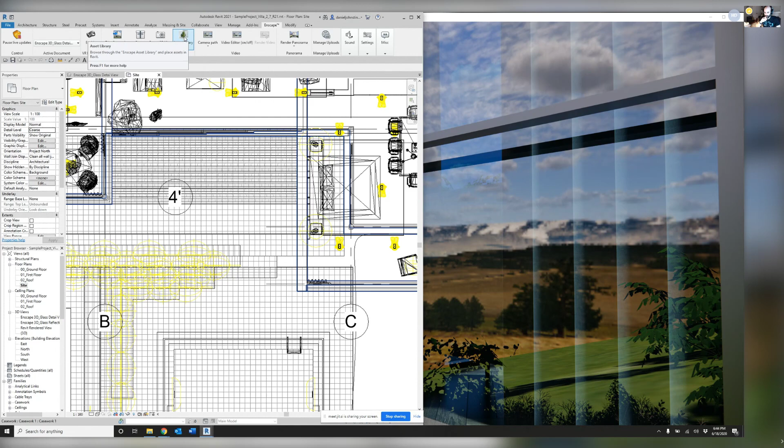So a lot of the content that comes with Enscape, cars and exterior trash receptacles and things like that, just aren't something that they have a need for. And they do a lot of high quality presentations. So Peter did some reverse engineering and got some input from the folks at Enscape, and he wrote a tutorial on the Enscape forums. And then I republished it on my blog a couple weeks ago.

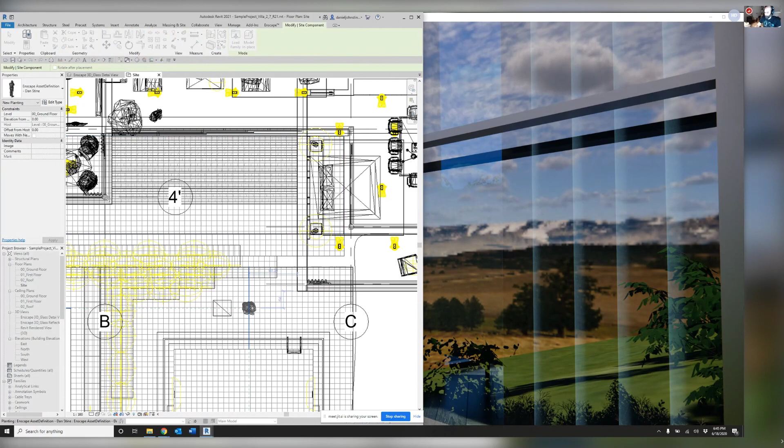Yeah. But you can see there's just a beautiful array of content here that you can create. Obviously, there's some special steps involved to make all this happen, but there's some really amazing content in here that they can use to further their brand, and the content with entourage, silhouettes, and then this is something he actually, for me, did a little bit of work to get something that had been previously created for an RPC content.

And that is, you see, things are running a little more sluggish while I'm sharing. Nice. So that's me. Yeah, look at that, huh?

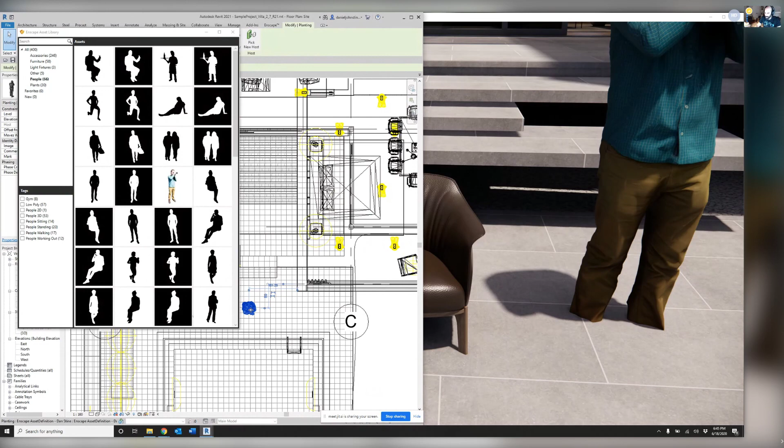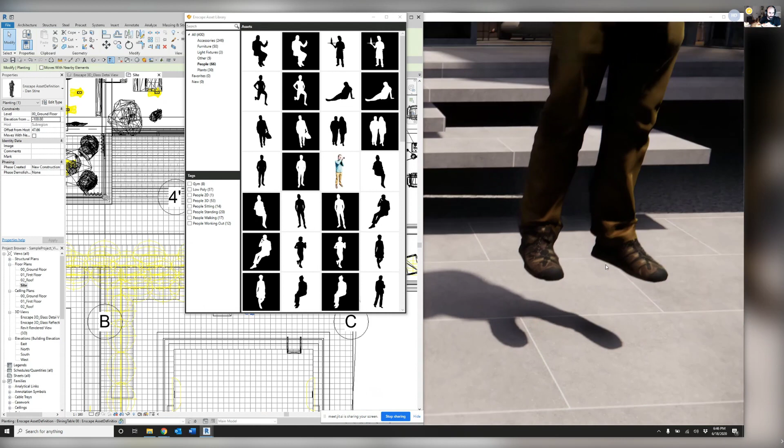So how many assets does he have here? It looks like there's quite a few. Yeah, there's 400. You can see in the parentheses after all. Yeah, so you can see my Keen shoes. It's just really great content. Similar quality. It's on par with what Enscape has. And there's the opportunity to toggle to the out of the box or the Enscape provided content, but all of his content is actually local, which is nice. So it loads a lot faster, it looks like.

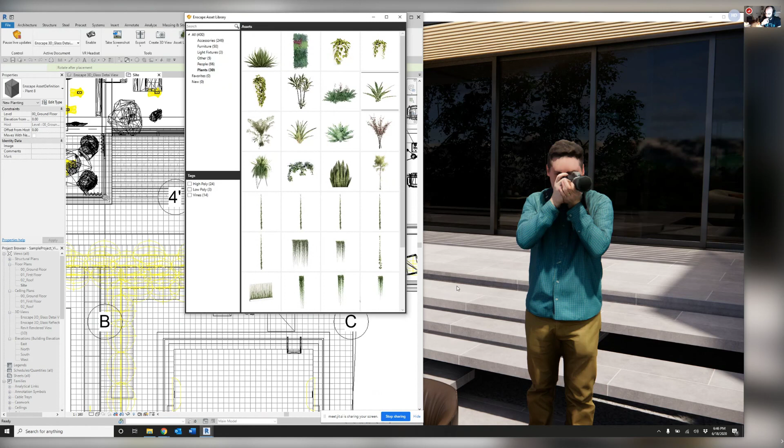Yeah. And then like a week later, he gave me another tutorial on creating leaves. Some of the cutouts and things that you need to do to make vegetation. So here's a cool plant on a stand. Very nice. Yeah, those look great.

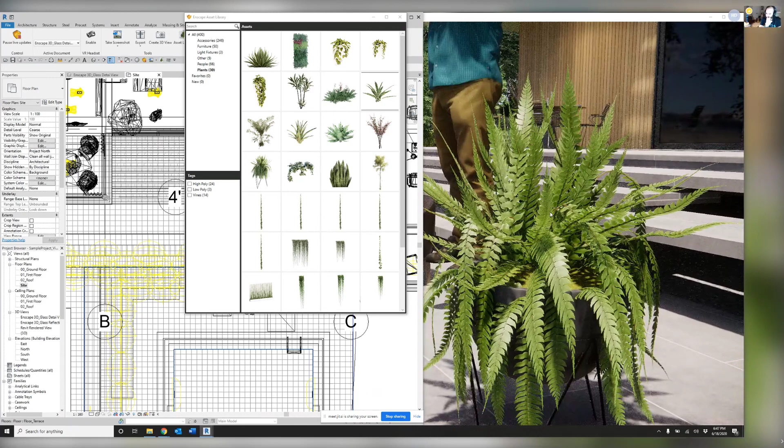So now, do you know how these were made? Were some of them scanned objects, or were they mostly modeled objects? I believe modeled. Like mine, the model of me was scanned. But I'm not actually sure, to be honest. Yeah, because those plants look phenomenal. The detail in those plants.

Yep, and I know even Enscape, talking to them a bit, most of the vegetation is modeled just because it's not really possible to scan something that's complex because you just can't see it from every angle, right? Yep. Even that furniture, that chair you just placed in the patio, the way the fabric folded in those creases, right?

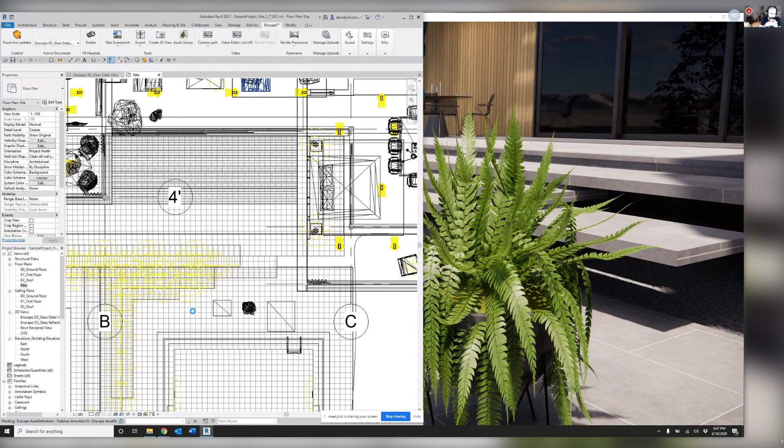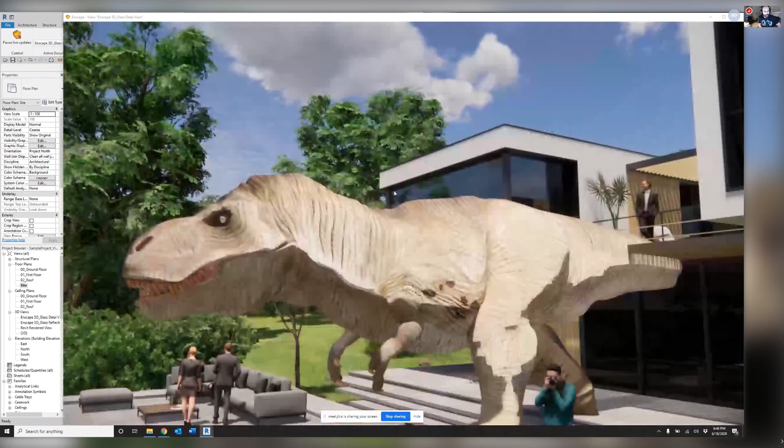Okay. Wow, look at that, a T-Rex. There we go. Now we're talking. Gotta have a little fun. So you have a bunch of these in this house. Can you run through a couple rooms and show how they look?

So actually this model is a sample project that anybody can download. And it's funny, when I said I'm going to work for Lake Flato, I pulled this up and I forgot that nobody could actually see it. That's okay. We see it now. Yeah. I held up the book though. Top ranked firm by Architect Magazine.

So on the Enscape website, if you scroll all the way to the bottom, there's free sample projects. And the one I'm using today is this residence. It's a really beautiful model with really awesome assets in it. Later, I'm going to be opening up this IES light gallery when we talk about lighting as well. So when you download this, it's a zip file with the textures.

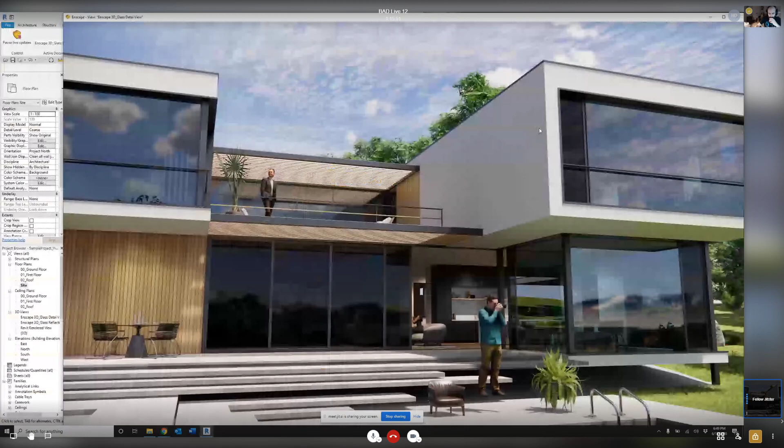And one thing, if you end up copying textures, this is a little side option to be aware of, right? If you go into Revit options and point to that folder, this allows Revit and Enscape to find those textures. So if you're downloading stuff from Haworth or Steelcase, Coalesse, you have to download the textures separately, right?

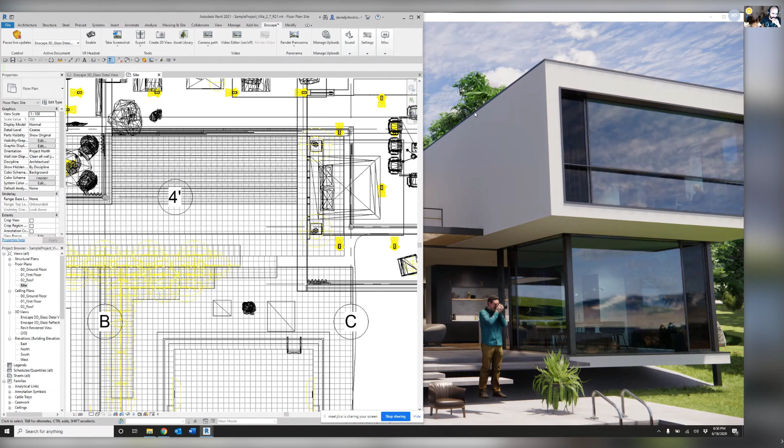Awesome. So I recognize the sample scene. Are these mostly the Enscape assets that are in that scene? I thought maybe I saw a couple new ones, or no? Yeah, so I think they have some things in here that aren't available in their library. So there's some pretty nice sofas and pillows and cushions. Cool. All right, awesome.

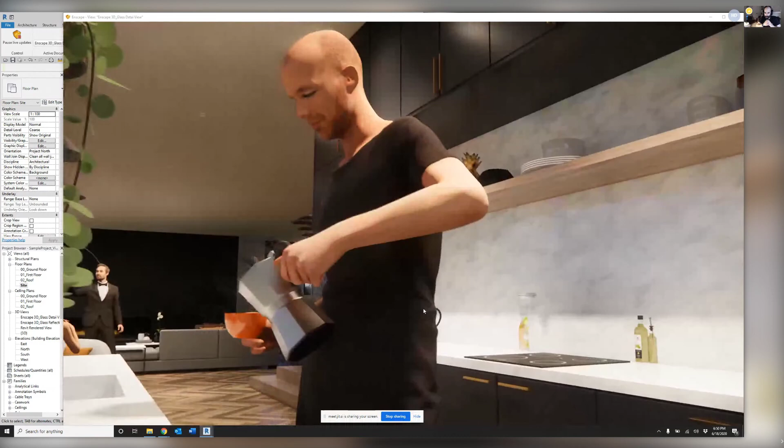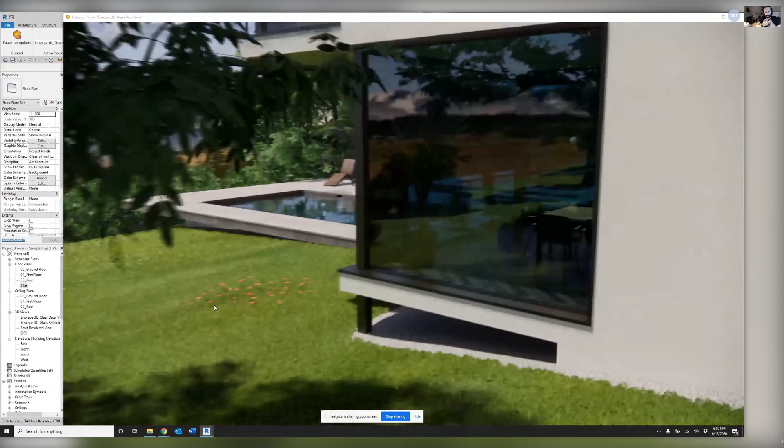All right. Should we move on to the next item? Yeah, let's do it. So custom assets, number one, and I will say that I do know Enscape is working on increasing their library. Every release they have more assets, so there will be more assets, I'm sure. I know there's going to be more assets in the future too. So they're increasing their assets, but people are able to create their own, which is phenomenal.

All right. So next we're going to talk about grass. And I should mention too, I'm using this 3D connexion mouse, which has been a little choppy now that I started sharing the screen. Normally it's pretty flawless. It allows you to, look mom, one hand. Yeah, interesting. I've never got into the 3D connexion mice. It just didn't feel natural to me. But everyone has their thing. It works a lot better in Enscape, if you invert the settings so that you push down on it, you go down, and you pull up, you go up.

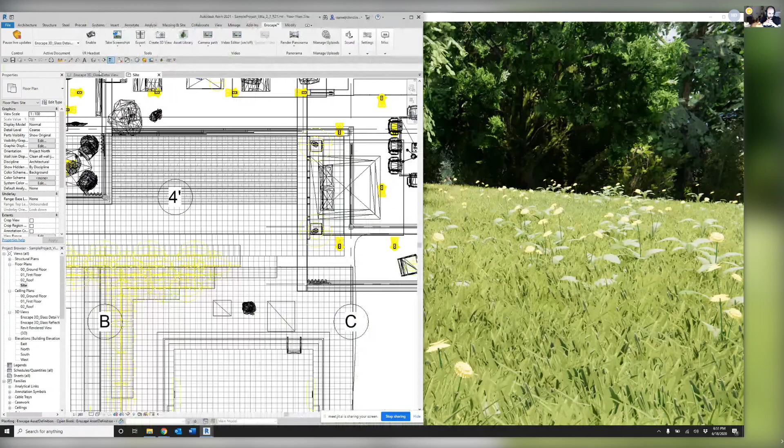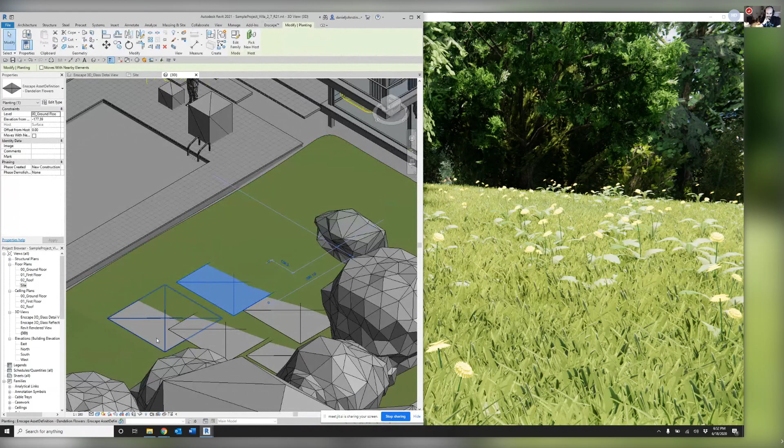But so grass. One thing that I find a lot of people don't know is you can adjust the grass. Yeah. So the first thing I noticed was the dandelions. Those are some hardy dandelions, and they look awesome. I know some people don't want them in their lawn, but they look great in renderings. Right, and so that's an Enscape asset. That's what these big squares are. So you're kind of limited on the shape.

So that's a custom asset from his library? No, this is Enscape provided content. Oh, cool. I've used that in a couple of projects myself. I didn't even know that was there. I knew the planting and stuff, but that's awesome. So, all right, look at that.

I learned something right there. Dandelions, they have assets for it. So I have pick by face turned on so that I can select the grass, and you can see the material is called grass. As most people probably know who dabbled in Enscape, if the word grass is in a material name, and sometimes that's unfortunate for like art glass that has the word grass in the name, right? Mm-hmm. You have to remove that in some cases. Mm-hmm.

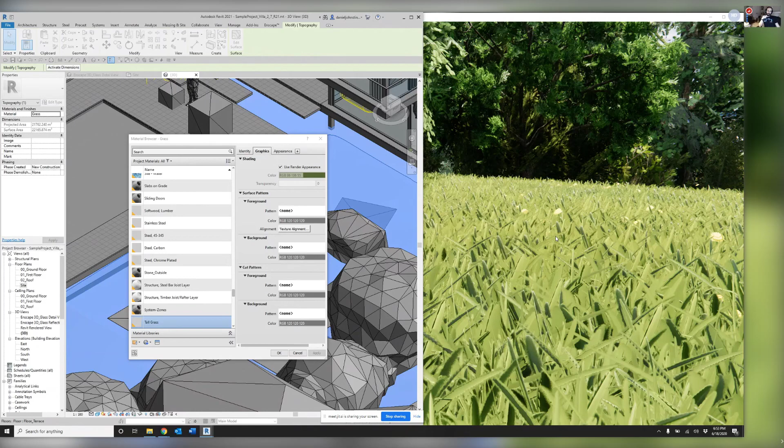But the name, if it has tall grass in the name, and I zoomed in by the dandelions just so we can actually see the change happen. Where'd the dandelions go? Wow. So would that work if you said tall green grass? Or does it have to be this? It has to be tall grass, the exact term. And now I'm going to show you how to deal with color in just a moment.

So tall grass, another option is short grass. Wait for it. There it is. So the short grass is sort of a nice manicured looking lawn.

Now, interestingly enough, as most people may know, Enscape also works in SketchUp and Rhino, Vectorworks, ArchiCAD. In those other tools, Enscape made their own material editor because SketchUp really doesn't have the controls to manage a material, whereas Revit has one that does most of what you need, so it doesn't make sense to make another one. But in SketchUp and those other tools, there's actually two sliders for height and variation. That gives you ultimate control in the height here instead of just the names.

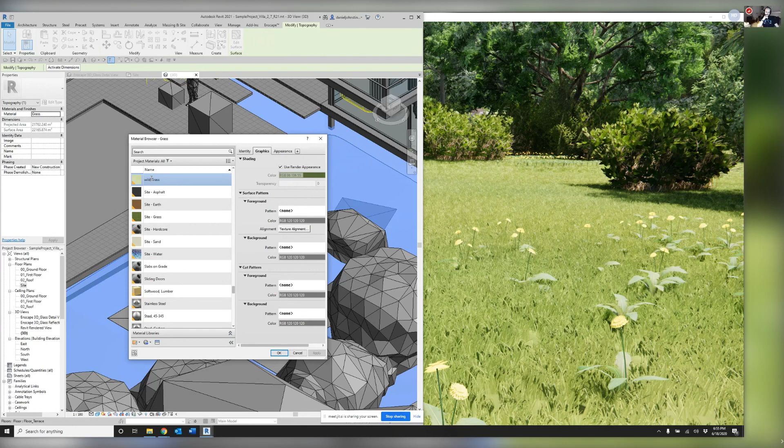And there's one more called wild grass. This is mostly tall grass of varying height. That's awesome. That gives a lot of control. I knew grass. Well, I shouldn't say I didn't know. I just didn't utilize it as much as I guess I should have. The wild grass I didn't know. That's pretty cool.

Now I'm going to switch that back to short. Now the default when you just say grass, is that considered the short grass or is that a medium? It's medium. Got it. Right. So short, just grass, tall grass, and then wild grass are sort of the four hierarchies. Awesome. All right, so I'm going to set it to short, and then the next thing that's kind of helpful to know is the grass color.

I also wrote a blog post on Enscape's website to get different species or different types of grass, and the one in the sample model here is already sort of doing what I'm going to describe, but the grass that comes with Revit, the albedo is way off. There's two, one's called site, one's called grass. One's way too dark and one's way too light for the albedo, which in the gaming world, they've nailed that concept of getting the base material, the correct color. So here you can see there's a pretty large variation in this texture that they're using, right? So there's a really light color there. Yep.

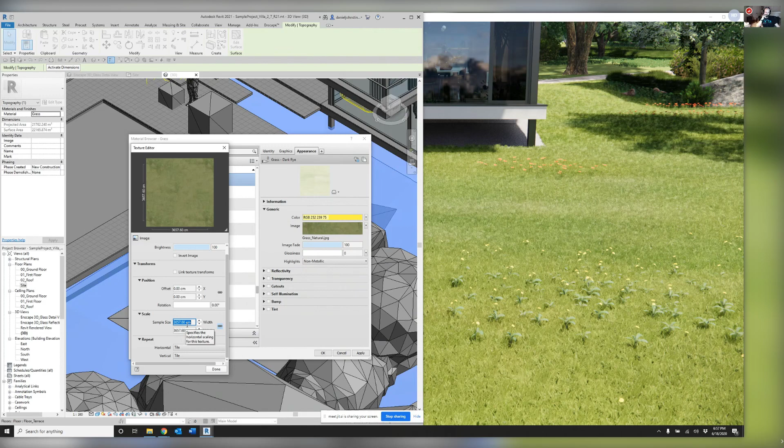So another little Revit tip, not so much an Enscape tip. This is obviously a metric based template file. You can see it's listing centimeters. But if you come in there and type 120 and the foot symbol, even in a Revit dimension, like if you're drawing the length of a line, you could type 25 cm or 25 m, and it'll convert that metric value to a hard imperial value, or vice versa.

Yep, that's a great tip. That's something I think a lot of people forget, is that Revit is unit agnostic. Right. It's very friendly back and forth, and that even works on formulas too. If you're typing formulas into dimension strings or something, you can do them all in feet as long as you're putting the units there, which is great.

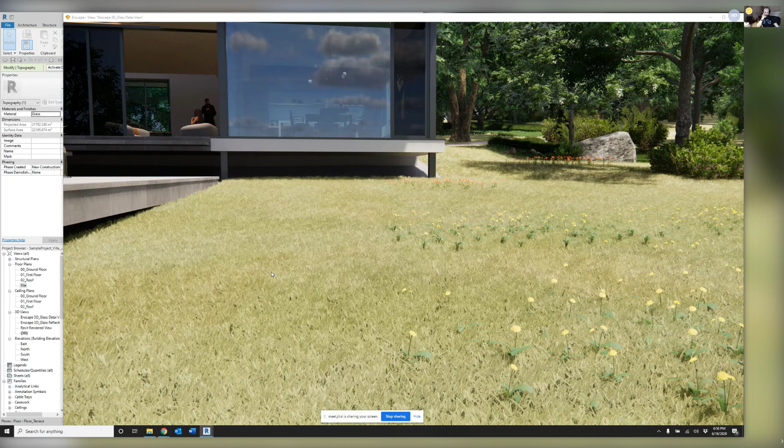That's a good tip. So now we have a nice grass color, and of course it depends on what kind of grass you're trying to achieve and where the project is, but you can see there's just a nice variation in color. It's not just this solid monolithic color, which is never a thing in reality. Right. Nice. Yeah, it's a little desaturated too, which I think always looks a little better in renderings. Right. And what's happening then is each blade of grass is actually sampling the texture under it. So we can do something sort of fun.

I'm going to do a sub-region. Jeff's already seen a preview of this. It's okay, I don't mind seeing it again. Yep.

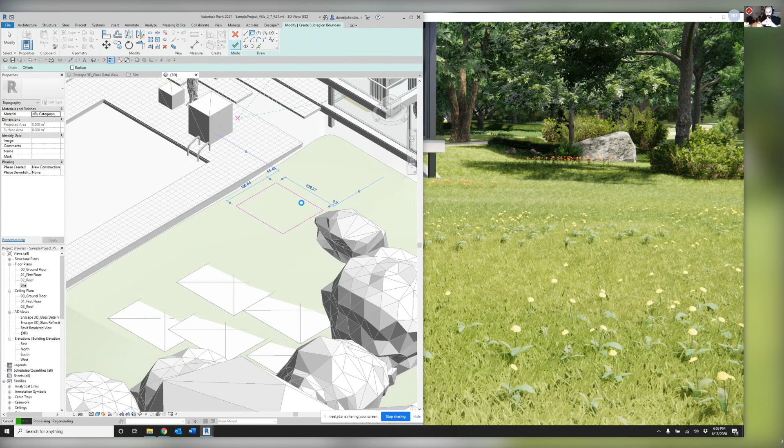So I'm going to make a new material once this is done. So here's my sub-region. I'm going to create a new material. I'll just duplicate some material. Call it grass. And nobody can answer this question verbally, but what's the first thing you need to do after you duplicate a material?

That's a great question. Actually, let's see if we have any answers. So, what do you have to do when you duplicate a material, everyone? I actually have a post from many years ago that's one of the most popular posts on the blog about this. I have a Revit idea about this we should put in the notes too, so everybody can go vote for it. Oh yeah? Yeah. I have it February 3rd, 2014. Nice. So I'll post that link in there.

Oh, yeah, somebody got it. Peter just got it. First one to answer. Duplicate the appearance asset. Thanks, dude. I think that deserves a book, right? What do you think? Yeah, for sure. He's cheating though, because he and I have talked about this recently. Maybe he doesn't get a book then. We'll let you decide that.

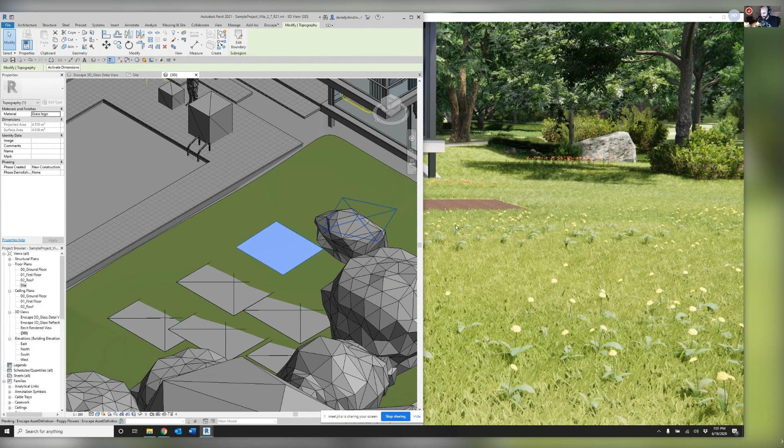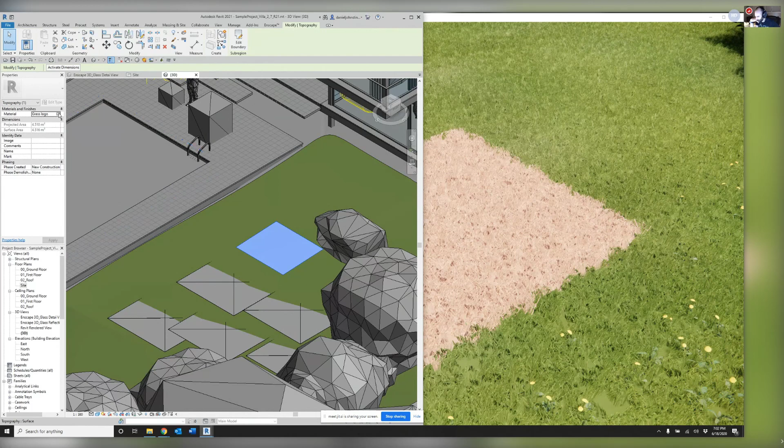Actually, Dan, you know what? That was a repost. I just clicked into it. That was a repost from your blog, I think. Oh, really? Nice. Check that again, because I just clicked into it, and let's see. Double duplicate. Oh no, it's a dead link. Yeah, maybe it points to the Enscape blog. They actually just redid their blog, and a whole bunch of my links on my website to their blog are now dead, unfortunately. Did you write some posts on AECbytes? Yeah. There we go. That's what the link was to. The dead link to AECbytes. All right. Well, maybe we'll have to repost that. We'll have to make that again.

Awesome. So you're putting the logo in. Yep. There it is. There we go. My size adjustment didn't work originally. Awesome. So you can do sports team logos, all kinds of good stuff. And I'm assuming now when you do it this way, if you just have the word grass in it, it's always going to be the medium grass, right? Right. Yeah.

So someone actually had a question that I think is pretty good and that's related here. Let's hear it. I lost it. Hold on. Okay, here we go. So John Gray, thanks for joining us. He said that grass keyword is an amazing feature. Are there any other keywords in the material names that work with Enscape? That's a good question. There used to be, but more for SketchUp and Rhino. But once Enscape made their material editor, I believe most of those went away.

So now, if memory serves me right, water has to be the water asset. It's not the name, correct? Right. I think it has to be the water material asset for Revit, not the name, right? Right. Yeah. That's correct. So I guess there were some that I used to remember too, but I don't think that any of them work anymore. Yeah, I can't think of any. So if anyone from Enscape is on the chat, feel free to chime in. And then if I think of any when I repost this on the blog tomorrow, I will. But that's a great question.

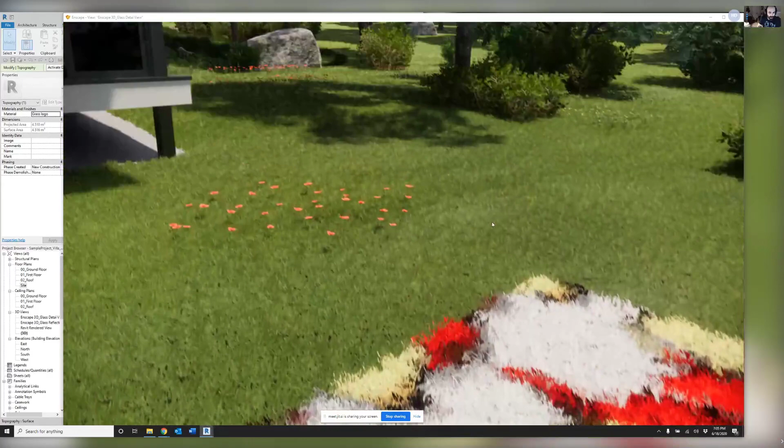Can you change the grass type in Revit? Or is it only the heights? Only the heights. That was just colors based on the... I got you. Yeah, colors based on the material or the asset. The appearance.

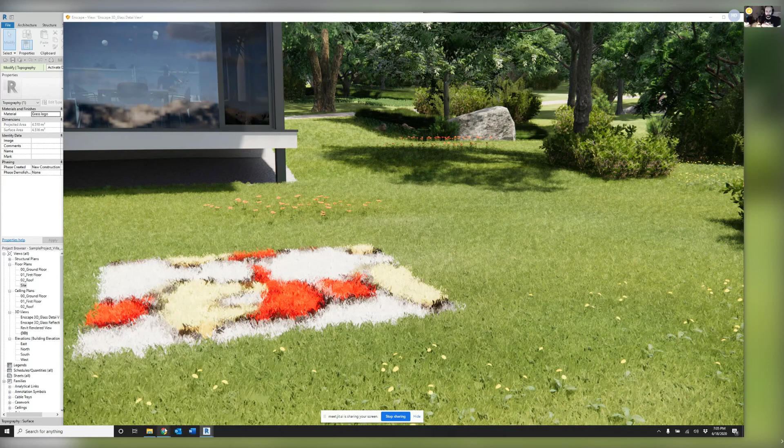Awesome. Well, that's a really cool tip. So, first tip there was duplicate materials for less headaches. So when you create a new material, always go over to appearance and duplicate the asset. Huge. And then being able to apply material to the grass, the blades actually take the material, which is super cool.

Yep. All right. Are you ready for number 3? Let's do it. I think everyone else is ready. I was just reading through. There's some good chit chat, but no major questions.

So next we're going to talk about real world application of glazing in Enscape. Again, an important thing when you're working on a multi-million-dollar project for a client and you pick the glass, you sort of want it to look right in the renderings, right? So there's different things like the color of the glass, the visual light reflectance, the visual light transmittance. All of those things can actually be achieved pretty accurately in Enscape.

The first thing that's interesting though about reflectance, if you ever open an out-of-the-box Revit template, it's using the glazing material type, so not generic and not the new advanced ones. But the reflectance is set quite low, so it almost looks like there's no glass. My books and my blog are heavily geared towards students, and most people are using the out-of-the-box template.

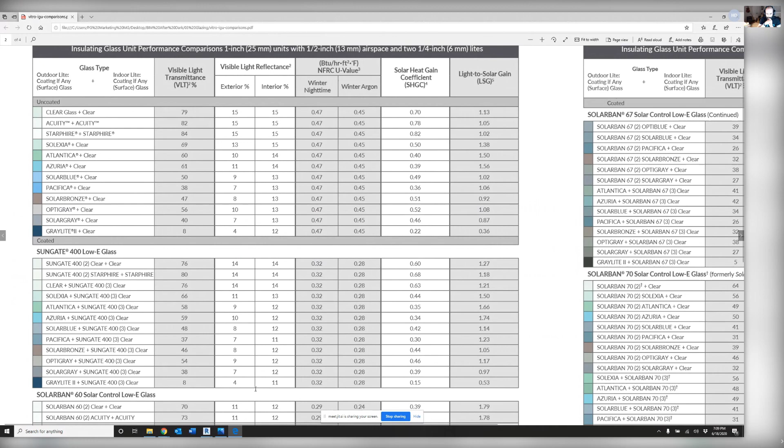Keep going, man. So what they've done is they've applied some real world physical constraints to the slider. And in their research a couple of years ago of literature, they only found up to 12% reflectance in any product literature for glazing manufacturers. Here you can see 14. If you scroll down, there's a couple even higher, but those have some special coatings. So if you're around 50, it's 4%. So anything in Revit around 50 or lower is going to be like there's no glass.

Right. And then if you crank it all the way up, you're only at 12% of reflectance, which again is a real world physical example. So why make it 100%, which would be like a mirror, if that's never going to be correct for the material type called glazing, right? Right. And then you might know, and we'll see this when we get into the material editor, but one material has two sliders, and they just use the average of the two to figure out what this reflectance is. Wow.

So you use the eyedropper, you get that RGB value, and then in Revit, well, actually, we want to figure out what material was used for this glass. So why don't we just select it in Enscape, and we can see the material used. There we go. Another secret. Another little secret. Actually, if you want to maybe unpack that, show users how. I think that there's a setting that you have to turn on for that, if I'm not mistaken, right?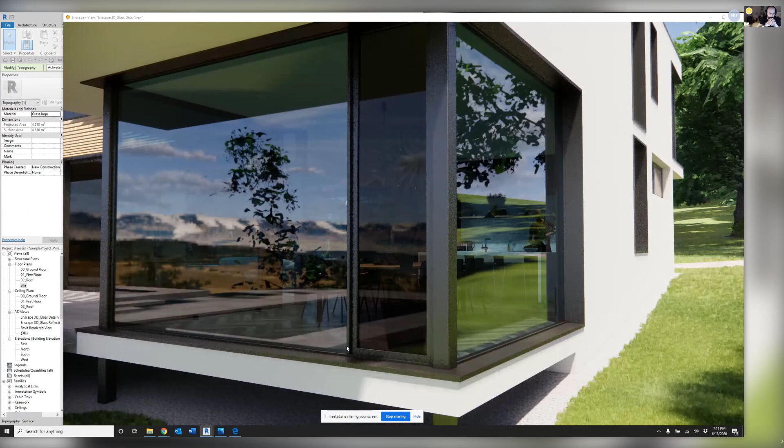Well, now it's just the B key. So okay. It used to be there was a checkbox where you had to turn on BIM information or whatever. Right, and I don't think that's still a thing. I hid the controls down here, but you can see there's just the B key. There's a B for BIM. Yeah. So B for BIM, and you can select any object in the scene and see information, all the Revit metadata, basically, right? Yep.

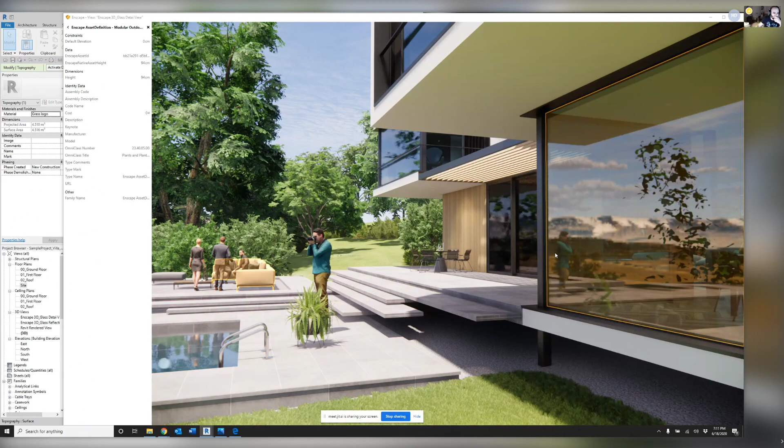And I'm going to save another new thing that's coming out in version 2.8, so you'll really like that. So we know what the material is. I'm going to swing back into Enscape. And I'll actually select it here again so I can just get to the material directly. So we'll try.

Oh man, the amount of new users that I have to explain tabbing through curtain walls to when I'm teaching classes, it's just so not intuitive for people. Yeah. I get it, you know.

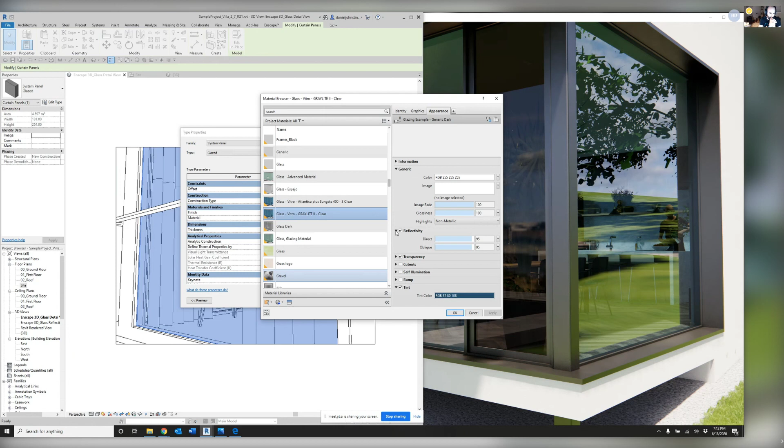Totally agree. So here's one of the glass types that was in that cut sheet. And here's another thing that I learned working with the developers at Enscape on this blog post is that you basically want to leave the color at white. And Enscape doesn't transmit light through the glass. It's just one of those real-time rendering things. It reflects the color of the glass, and that can be achieved by adjusting the tint.

A lot of places on the forums and in blogs, if people are purely looking at adjusting the visual light transmittance value, they'll just enter a grayscale. But if you want the color of the glass to show up, you need to actually derive the visual light transmittance based on color, not just grayscale. And one cool way to do that is if you use an advanced material.

So in Revit 2019, they came out with basically the PBR materials, and I think you've written a blog post on that, right? Yep. PBR materials. Yeah, a couple weeks ago, or maybe a month ago now, when they first came out, I ran through, and that's super cool. When used correctly, man, they look really, really nice. Yeah, totally. I'll definitely post a link to that in the chat for sure.

Related to that, there's one little secret. If you're replacing the material asset and you go to miscellaneous, so the appearance asset, miscellaneous, and then base materials. Here's the five fundamental advanced materials that you can use, and one of them is transparent, which would be for like a glass vase or something that would refract light.

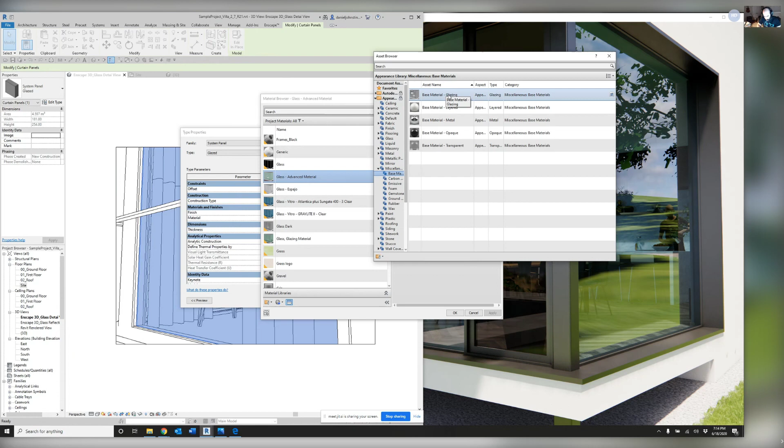And then there's glazing, which in Revit's rendering engine, and similarly in Enscape, doesn't distort light for efficiency. But then the glazing has a value for visible transmittance, which is actually something that's now used in Autodesk's lighting analysis tool for doing daylighting calcs. This actually works. When it first came out, it was sort of broken, but you can plug in a color here using that eyedropper tool, and then maybe adjust the luminance to stay in the same color range.

But as you do that, you'll see the visual light transmittance value adjust. And so the reason I point this out, even though this doesn't completely work in Enscape, you can use this to derive your value and then come over to, so this is the one we're currently on, which has this sort of blue tint to it. If we select this other one, it's a lighter color.

Remember I mentioned there's two reflectivity sliders, so it averages those two, so just make them the same. Right. And then we hit apply, and you watch the material update, and you should see it change to have that tint of, it just updated. So you can see that tint of green now in the glass.

And so this is another example with the glazing material. So this is something between advanced and generic that Revit came out with a few years ago. The sheets of glass doesn't matter, but again, the reflectance and then the tint color, you can basically achieve the same results, whether you're using that material shader or the generic one. And then again, you want to sort of stay away from the transparent option. But that's getting real world glazing into Enscape.

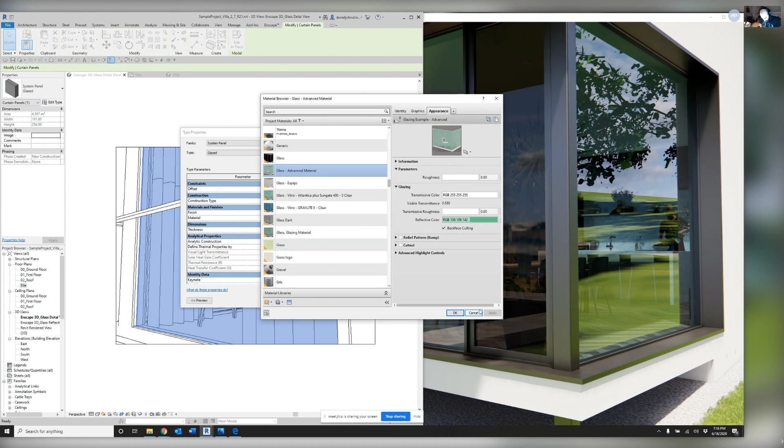Phil Reed has a post on LinkedIn too about getting some frit patterns and things like that. Awesome. Sweet. That's cool. I think that's all I wanted to show for glazing.

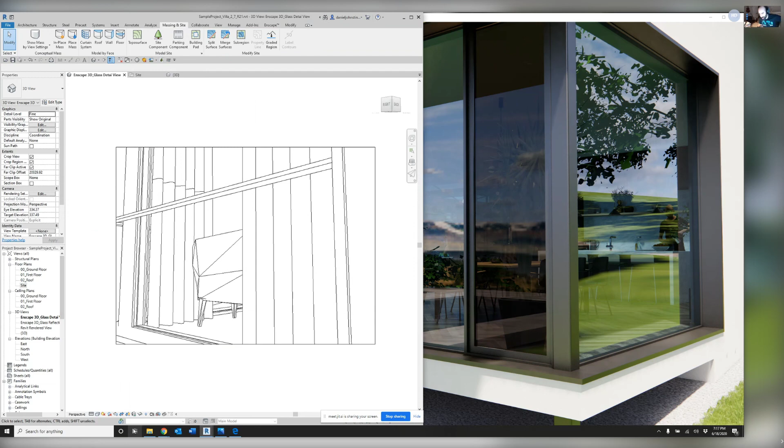All right, so should we move on to lighting? Yeah, let's do it. I think everyone's engaged. I was digging through. There's a couple questions, but nothing. Actually, can you import IES data for lights was a question. Oh yeah, we're going there. Looks like that leads us right into it. So Elijah, thanks.

Actually, I should have thought this through. Before I leave this model, I want to quickly talk about custom Skybox. Oh sure. And so the lighting file I'm going to open is kind of blah. So that'd be kind of a bummer to use that one. So I also did a blog post for Enscape.

You can see there's still big chunks of ice out there in the world's largest freshwater lake, Lake Superior. So this was sometime in March, I think. So let's say we're going to build a building on this site, and we want to have an actual background in Enscape. And what's cool about that is the reflections in the glass and even things inside the building end up reflecting the real world, which would be almost impossible to get all those subtleties if you're doing post production with the background.

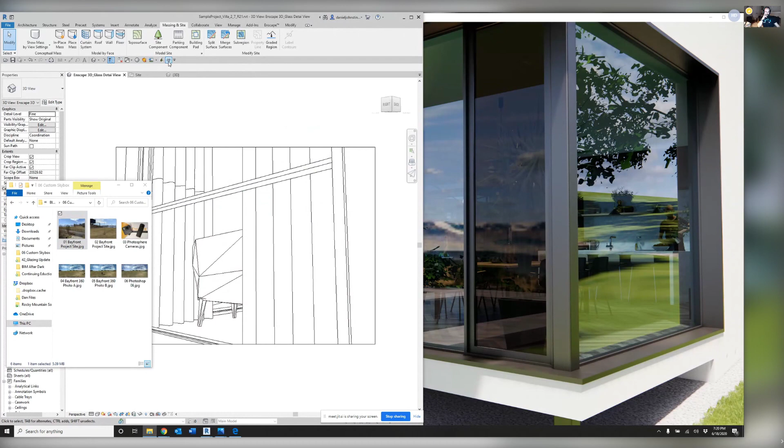So I'm going to go into the settings. You can see all my favorite Enscape commands are on the quick access toolbar. Yep, pinned them there. Very nice. And I'm going to go to Skybox and pick a custom Skybox. And what we're going to see here is the good, the bad, and the ugly of this. There's definitely some drawbacks to this.

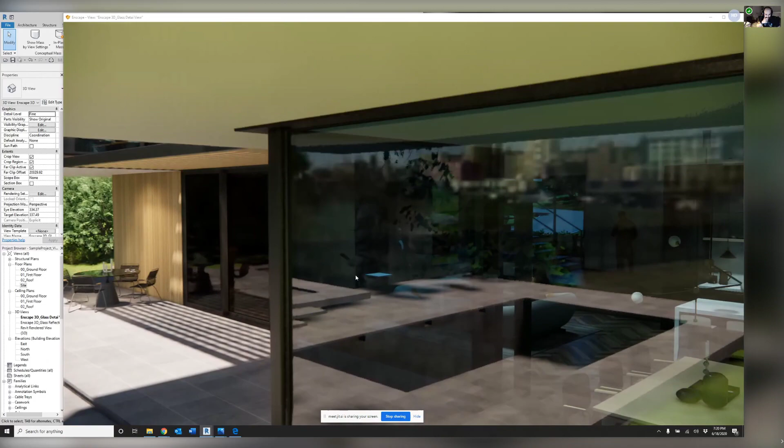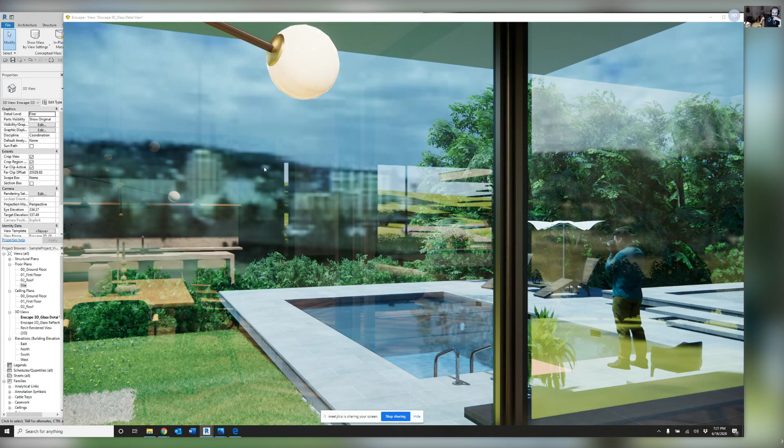So here's the background. And this again is the 1K image, so it definitely is a little bit lower quality. Yeah, it's definitely looking for more resolution. Yep. And they just made an adjustment too that reduces the memory use of the Skybox background. So hopefully it doesn't actually also mean quality loss. But when you're inside the building, even if you're looking towards the building, you're going to see reflections in the glass of the background.

Definitely. Where it really starts to fall apart is depending on how big your site is, right? You can't get too far up before all of a sudden things start looking really weird, or too far away from the building. Yep. Yeah, the scale is a little wonky there, right? Yep. I'm sorry, I'm moving kind of fast, but the point is that if you're in a room and you're not moving around too much, it's going to look good.

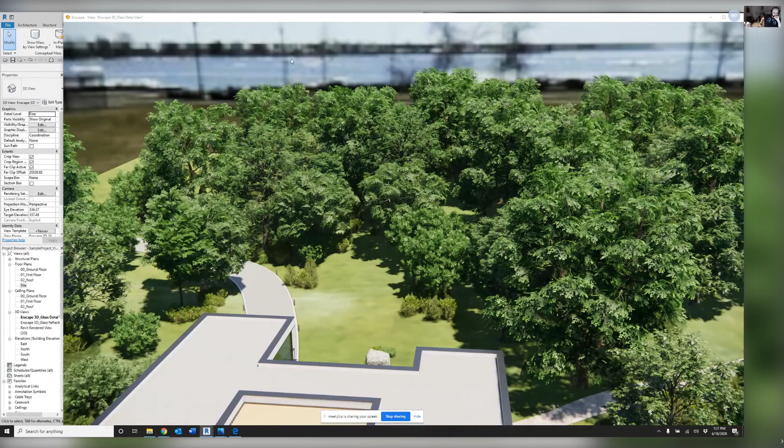But the reason the ones that come with Enscape work is because they're really far away, right? The mountains and the tree line. Correct. Their subjects are extremely far away from the camera, so to speak. Right. So that's the background. That's all I wanted to show there.

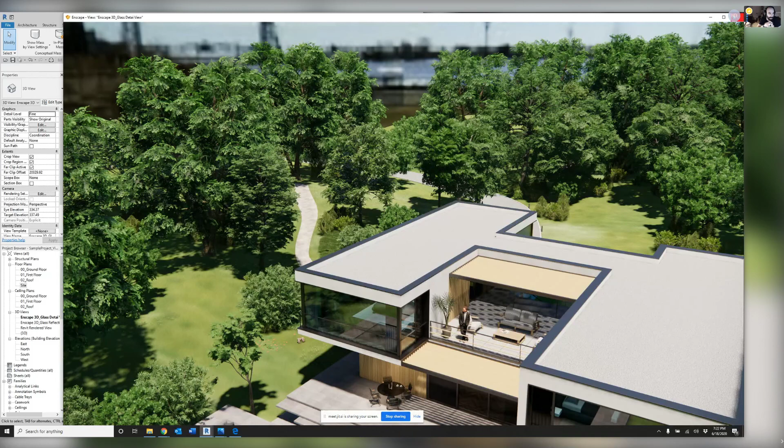360 camera and Skybox. And I should mention that there are lots of stock Skybox images online if you wanted to look. If you wanted something that's not directly your site, but something that's similar, or you just don't want to use the Enscape ones, there are some good websites out there with Skyboxes.

And then there's also an option to change the overall brightness, because it used to be if you used a custom Skybox and then you switched it to nighttime, the background was still super bright and odd looking. So you can see I just adjusted it, and the background changed to be much darker. Great. One last Enscape trick: if you double click on the slider, it resets it to the default. Nice. Double click on slider.

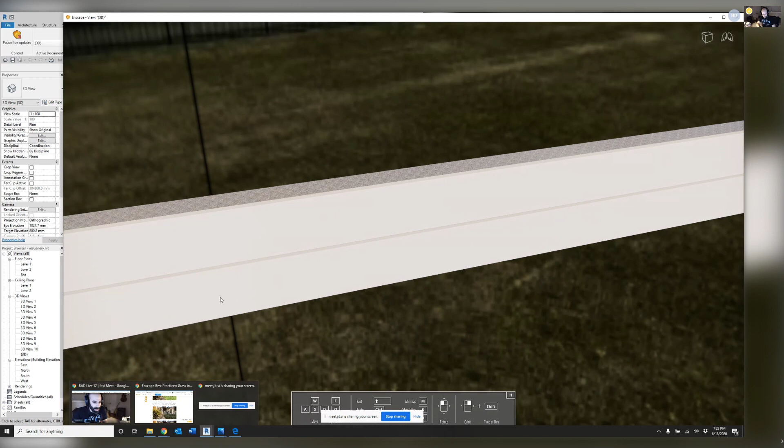So I opened the next Enscape file that you can download from the Enscape website. And I'm going to have to go in and turn off this background now. This is why I wanted to show it with the previous model. I'll just set this to white ground. So this is a sample that has a ton of IES files. And this one is in the same location as that other one, which I think I posted. If not, I'll post it in the description, on the Enscape website.

If the light source is in the geometry, nothing lights up, right? And the Revit family editor will give you that warning. The thing that's sort of wrong about that is the light source already includes all the reflections on any of the geometry or the housing. So it should just ignore the geometry in the family to emit the correct light source. And so even when it's positioned down below, like a pendant indirect, it obviously can't shine through that fixture to be direct or indirect. It can only do one.

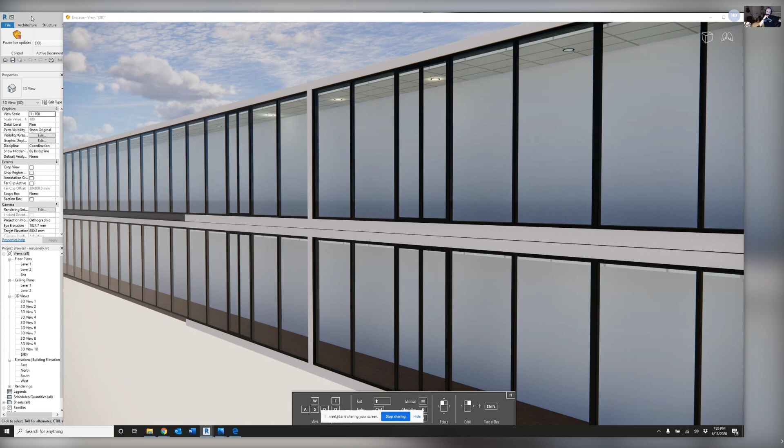All right, so a question that comes up a lot, and this is one of those secrets, is Revit lights are always on. People are like, how do you turn on the lights? I don't want the lights on only at nighttime. Right. Well, in this case, there happen to be a couple of really bright ones, so you can tell that they're on. But because of the auto exposure, it usually washes them out, right? So there's a setting for that. Just that all by itself is kind of helpful to know.

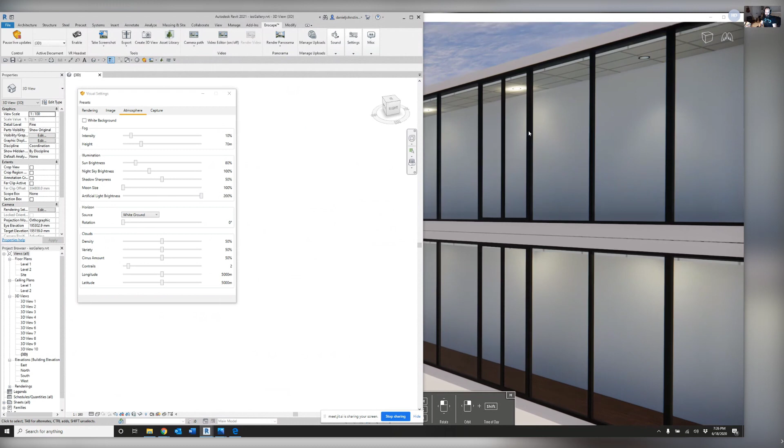And it's artificial light brightness. So you can basically crank up the artificial light brightness to get your hot spots and still have that notion of a wall wash, or imply to the client that that's really going to be a good spot for a light fixture. But next thing that we'll look at, and if you see any questions or comments, obviously feel free to stop me and ask about it.

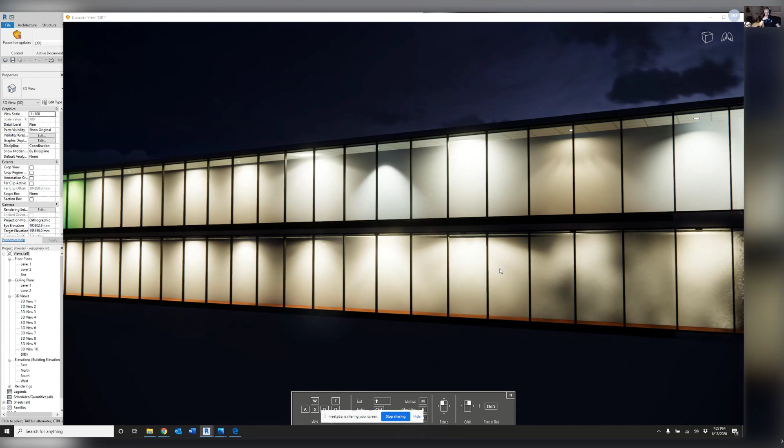Definitely. So if we set this to nighttime, they have a really nice array of settings related to the initial color, the filter. So a filter might be an actual filter or a gel pack that can change the color of lighting. And then you can see the different shapes. So again, the reflection off the housing of the light produces this really interesting pattern on the wall. That's purely defined by the IES file, because there is no geometry that would cause that to happen. But so this is a good tool to sort of reverse engineer how the lighting works.

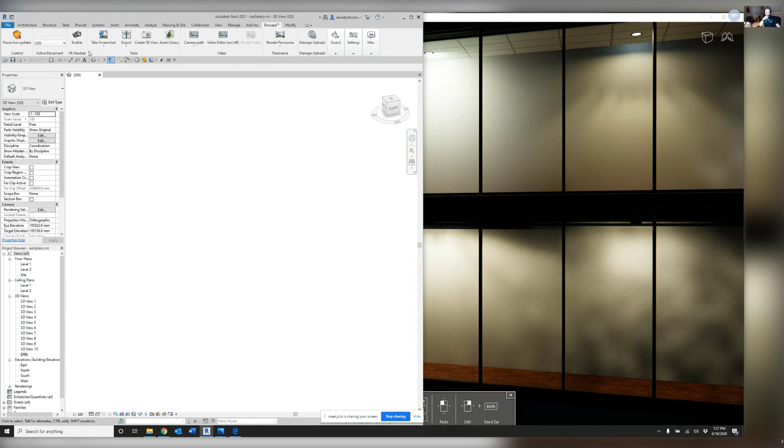And one of the things you can do in Revit then is turn on the light source. Yep. To visualize that. And if you remember over here, at the end and the top, there's a red light. So if we select that and go to Edit Type, and then down to the lighting options, you'll see initial color. So this is set to fluorescent cool white. Notice it's not red. So the redness is coming from the tint, which is also not red. Maybe I have the wrong one selected. Maybe you're on the wrong side.

But yeah, I might be. But one of the things I wanted to mention though about initial color that's super important if you're making your own lighting fixture content or even some of the light fixture manufacturers, the color temperature actually doesn't really matter when you're doing lighting calcs to derive foot candles. So a lot of times people might ignore that setting in Revit because it just doesn't matter what the color temperature is relative to the foot candle. It's not 100% true, but mostly true.

So this ends up being some generic setting. I forget which one. It looks like this really pasty orange yellow. The default light fixture is something really bad. So you want to come in here and set it to whatever you think the value should be. It could be daylight, or white. So what you're saying is the initial color temperature affects the color, but doesn't affect calculations. Correct. Yeah. Cool.

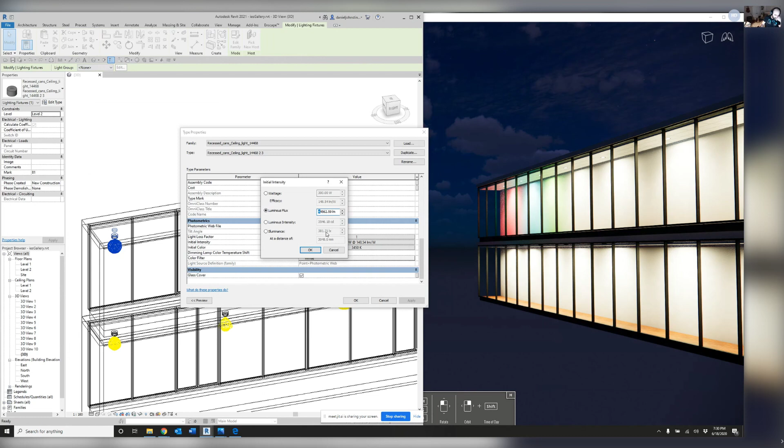So one of the questions someone had actually about IES is, oops, I just missed it. Does Enscape read intensity from the IES file? The initial intensity, I assume is what they're talking about. Yeah, I'm quite sure it does not. Yeah, me either. So if you want to adjust the brightness of that fixture, not all of these work the same in Enscape. So what I do is just try and remember which one it is. I'll just crank it up like obnoxiously brighter.

I have a feeling it's on the other side. I think you're right, reversed because of the wireframe. Yeah. So there it goes. Yeah, you can see that changed quite a bit. So I'm totally on the wrong side. Well, that's why you couldn't find the red, I guess, right? Exactly. Hey, and you notice how I just kept rolling with it? Don't forget, this is a live show.

It's all good. Yeah, so wattage is difficult because most people don't know how to calculate the efficacy, and I don't. I talked to some of my friends at ElumTools, and it's a really complicated process. So those two actually work together. So luminous flux, and I believe that's why Enscape favors one versus the other three. So I just made an adjustment there, and nothing changed. Wait for it. Obviously, a 3-watt light fixture wouldn't emit much light. Looks like it wants you to get out of that dialogue, maybe. Oh, well, maybe. Let me try changing it now to...

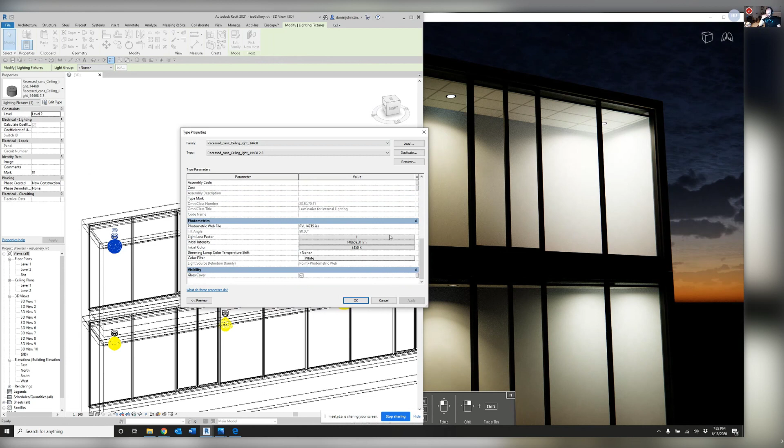Yeah, you're right. Get out of the dialogue. Yeah, it's not like materials. All those Revit dialogues aren't made the same, apparently. So there, it definitely changed. So it looks like that actually does work too. So nothing like trial and error on a live show. That's awesome. That's great. Crank that way up. Yeah. So that still is affecting it, which is great.

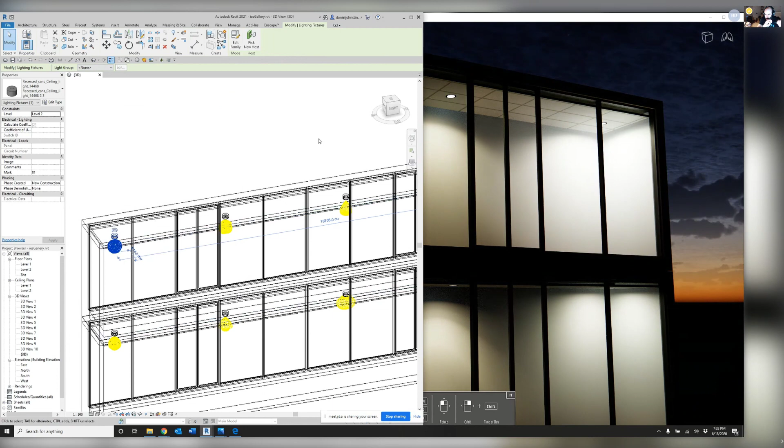Just so you know, I can't see the comments, so that's okay. I'll let you know if there's anyone making fun of you or anything like that. No, don't tell me that. I'll tell you after. No, I'm kidding. Okay, cool. No one's making fun of you. Not in live chats on YouTube. In comments, they might do it on YouTube, but yeah. Who would give people a hard time on social media?

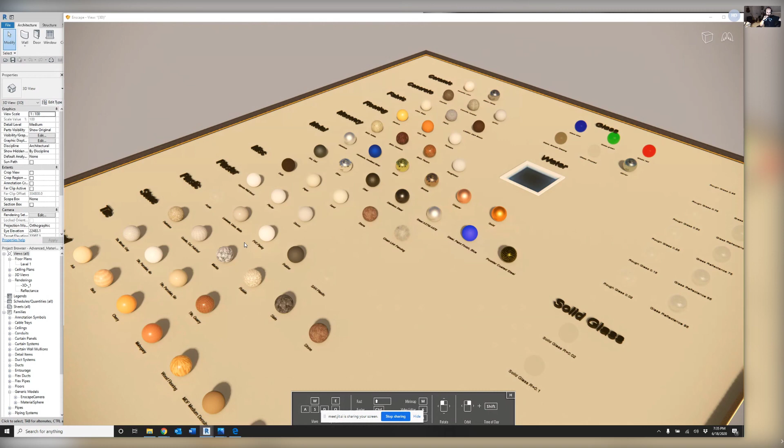So again, there's some sort of cool ways of reverse engineering some of the materials. Oh, and there's one last thing I got to show you before I zoom in on these materials. If you have the current beta of Enscape, and this will be in version 2.8 that comes out. So we typed B on the keyboard to get into BIM data. If we type C, we get into the collaboration tool, where we can right click and create an issue. It renders that view, so you have a recollection. Issue number 1, and what's wrong with this thing that you want to share with the team. And then down at the bottom you can save it.

And now you might be thinking, wow, there's so many collaboration tools out there. Why do we need another one? Well, if you don't like this one, just dial it into BIM Track. That's pretty cool, right? Wow. So seamless collaboration with really, really pretty pictures. Oh, that's pretty neat. I was wondering where you were going with that. Since we're on the topic, this year is when we first started using BIM Track quite a bit on 2 of our projects, and I continue to be impressed with it. So super cool.

Yeah, they got an awesome technical engineer on staff now, Carl Storms. Oh yeah, I think a lot of people out there may be familiar with Carl. Carl, what's up, man? I'm sure Carl's gonna watch this in the future if he's not watching it now. And then you can mention it on BIM Thoughts and Simply Complex. This will have a ripple effect that we won't know its full extent. What Pandora's box did we just open?

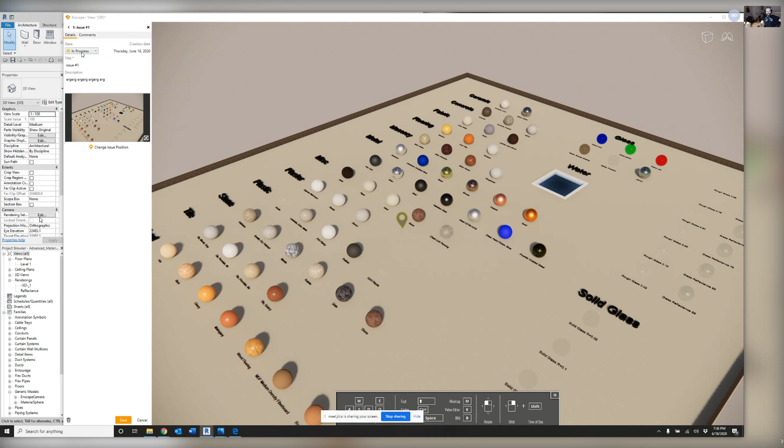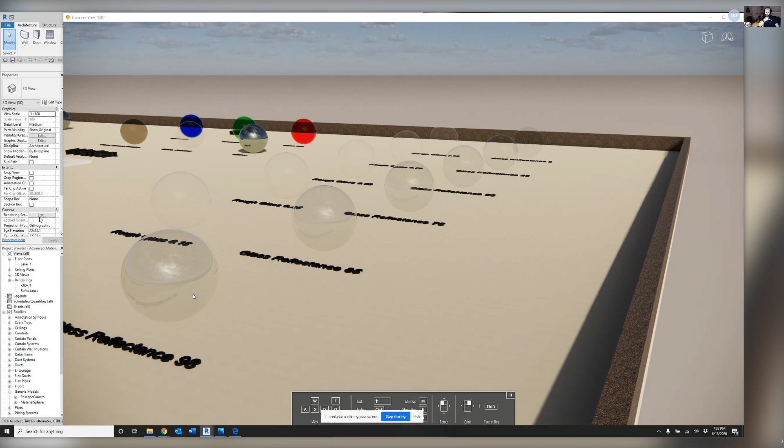So you can set the status of the issue. It's really cool. Yeah, very cool. All right, so back to materials. There's just some really awesome materials we were talking about, glazing, obviously. So look at this example. You can see it going from a really low transparency and reflectance up to this really nice sphere that you can really see.

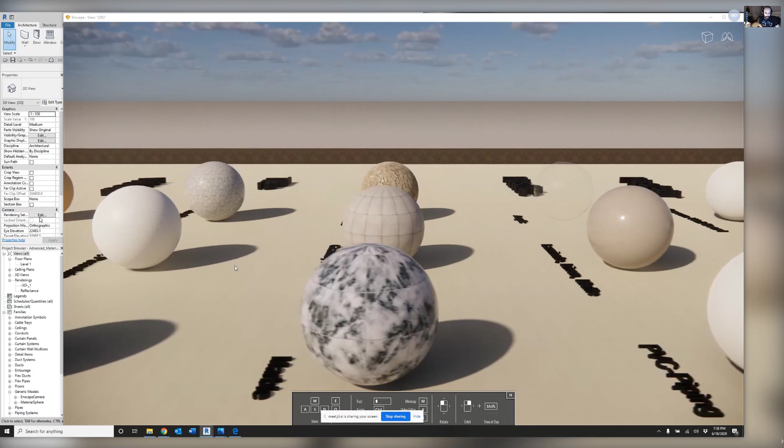Yeah, materials always look so great on spheres, don't they? Right. Yeah, some of them do. Some of them can look a little weird. Very cool. So this is an asset library that's using the PBR type materials? Is that what this material file is? Well, no, actually, I believe these are all just generic materials. Okay. You can see they all have the little orange icon.

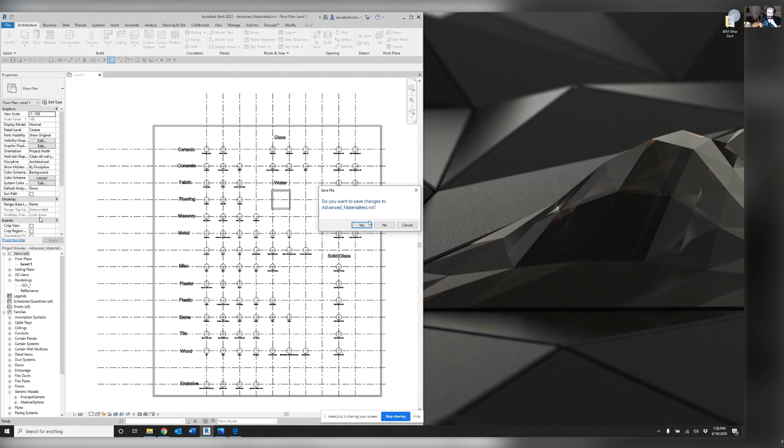Okay. So now we'll switch over to mine real quick, and this will be the final example. And I actually set this up completely using all of the advanced materials. Okay. That actually come with Revit 2019, 2020, 2021. Mm-hmm. These are actually pretty nice materials. While that's loading, and then even once this opens, I'll get Enscape opening.

I'm sure you're familiar with where the materials are stored on the C drive, right? Yep. Or actually, I'm going to the wrong spot already. So Program Files x86, Common, Autodesk, Materials, Textures, and it'll be interesting.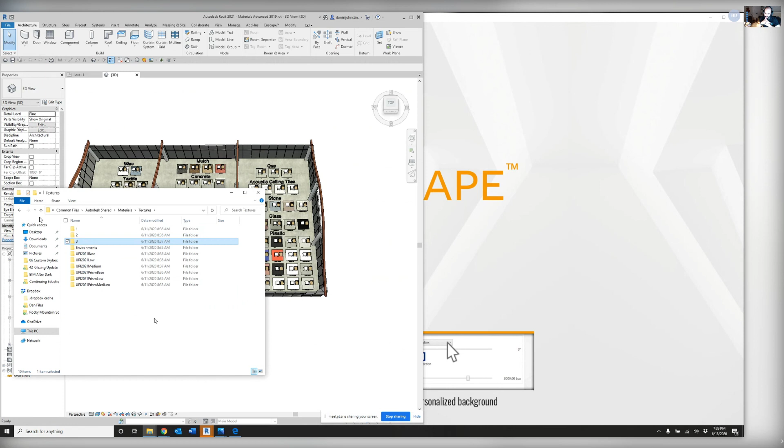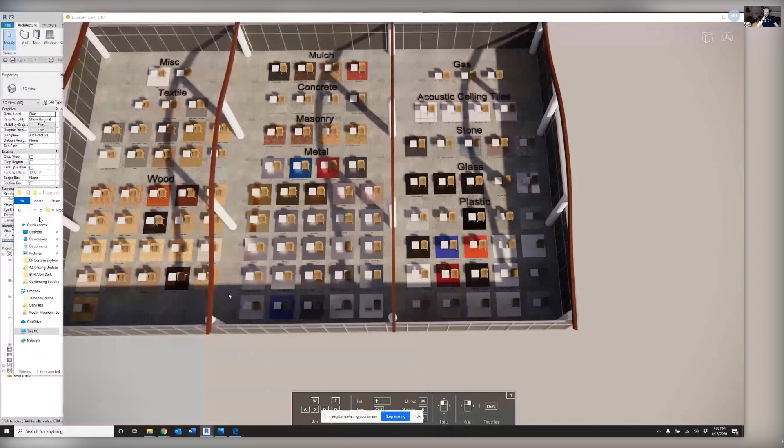Oh, so this is a cool little file. So this is the advanced file that you set up. Yeah, so this is just something I made. I actually added a chair and a table with some nice sort of chrome legs. And these materials that come with the advanced assets are really cool because most of them are like 4K textures, and they're larger areas. So they're larger images, so you don't see the repeating pattern as much.

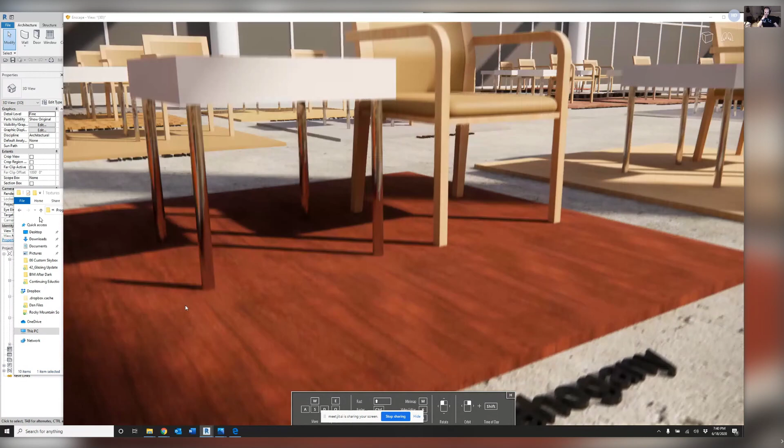So here's an unfinished plywood, which is really pretty nice looking. It is, yeah. And then there's also a really nice oak floor. Well, this mahogany one is pretty nice. And these have the reflectance map. So as you change the time of day, there's going to be some dull spots in the material.

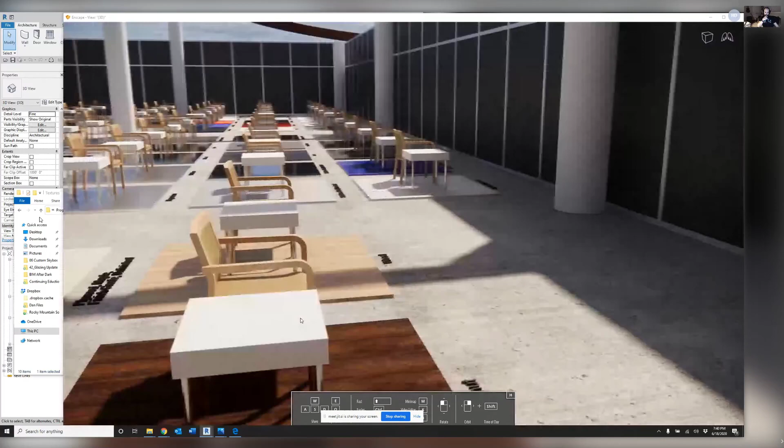In Enscape 2.8, there's some pretty cool bump map adjustments for the non-Revit applications of Enscape, where you can do some really deep texturing. Unfortunately, I don't think that's an option for Revit. It'd be nice if they put that in the Revit version. I know. We could always use more bump, right? Yep, exactly. So, steel.

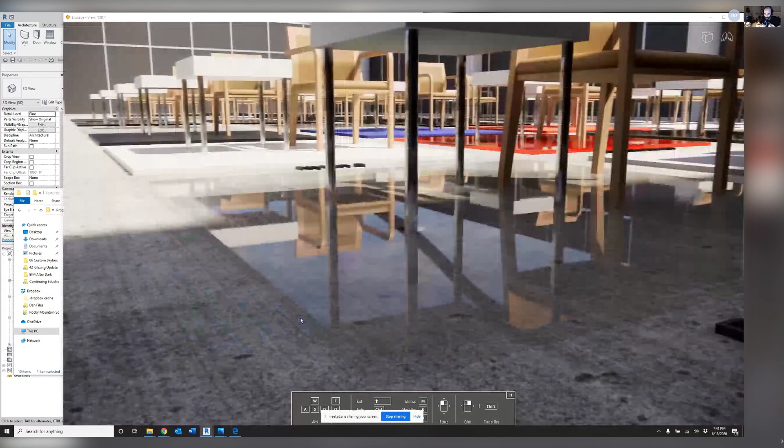So 1, 2, and 3 are, and I guess you can go through them real quick if you want to show. Right. So if you select this image 102, you can see it's 195 kilobytes. Image 102, 766 kilobytes, and if you hover over it, see it's 512 by 512. And then 102, it's 2.75 megabytes, and it's 1,000 by 1,000. Now these are the whole history of materials in Revit.

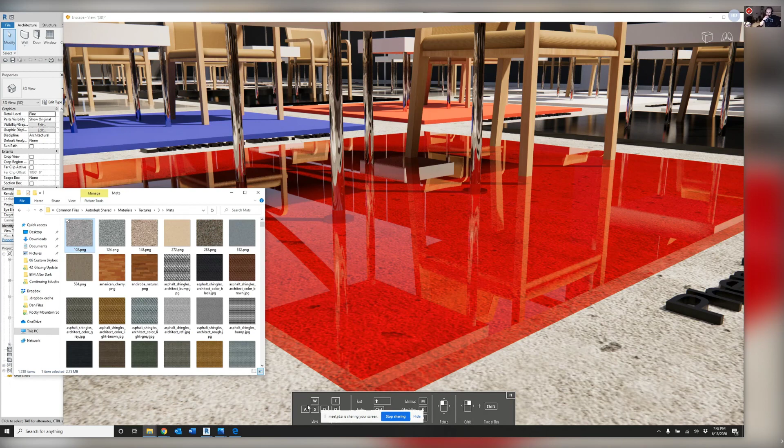So if we come in here and sort by size, this is kind of fun. And sometimes not so much. So one of these image files that comes with Revit is 14 megabytes, and you're gonna love this. This is it. Oh man! I don't know what that is. I've never used it, but it looks like a zoomed in shot of a brick face or something, with no repeating pattern or anything.

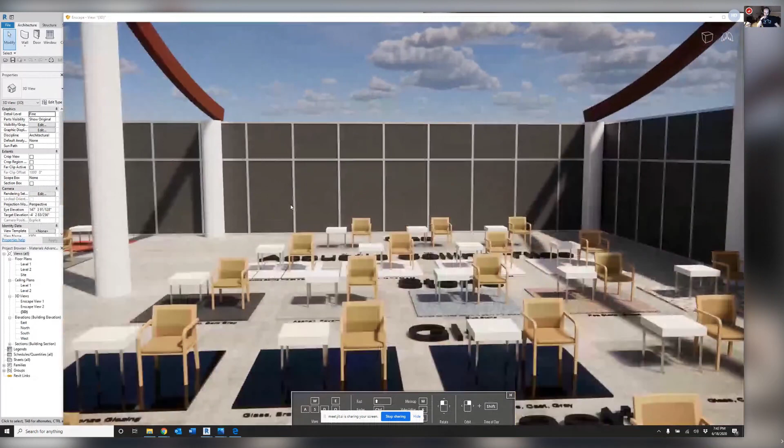Right, that's a bizarre one, but you can see this is a 4K image, 4,000 by 4,000. Awesome. And this also looks similar. I think this is a brick. What is it called? Brick light blend. So the advanced materials are just nicer, higher quality, and a larger area to have less repeat, or less ability to see a repeat. Here's some glass, different glass materials, so if you're using spandrel glass.

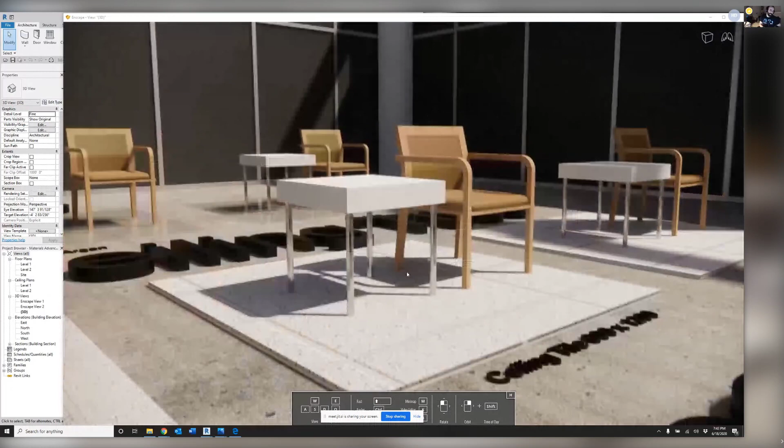Awesome, this is great. There's actually one last thing, and then we can wrap it up. Don't ever use the ceiling material that comes with Revit's template. Oh my God, don't ever, ever, ever use it. There's actually a pretty nice one with the advanced materials if you're going to at least use something, where the metal actually has a reflectance separate from the acoustic tiles, the way advanced materials is set up. Awesome, that's definitely a good tip. Don't ever use this stock. There's two things you should never use that are stock: the stock Revit red brick and the stock acoustic ceiling. Yeah.

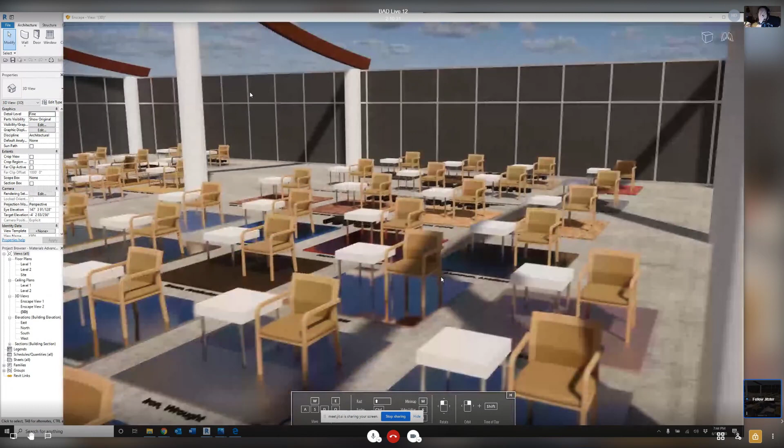So if you want to stop sharing your screen, we can see each other again. Yep. There we are. Hey, am I back? Okay, you're back. Awesome.

Well, that was awesome. I even took a whole bunch of notes, because I want to try and capture it a little bit in the blog post. I think you threw in a whole bunch of tips and tricks, so thank you for that. I think there's a lot of things that people didn't know or maybe are figuring out right now as far as Enscape and Revit are concerned. So thanks for doing that, Dan, I really appreciate it. Yeah, it was a lot of fun.